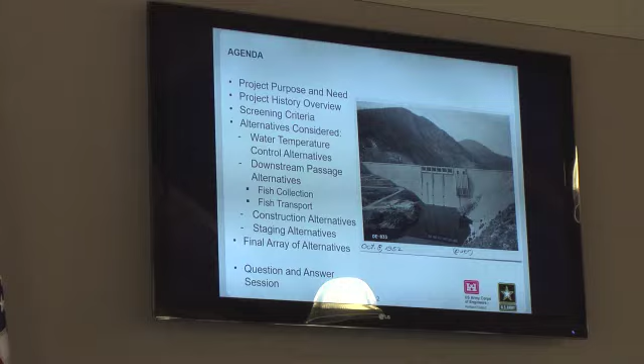Then I'll go through the history. It's a complicated timeline slide, so we'll go through it step by step. It might take a minute. Then I'll talk about the screening criteria, so how we decided which alternatives weren't going to work and which are moving forward. Then I'll talk about each alternative we looked at from the beginning until now, including alternatives for achieving water temperature control, alternatives for downstream passage, which has two components: collecting the fish and then transporting the fish downstream so they can be released. And then we'll talk about the construction alternatives and the staging alternatives.

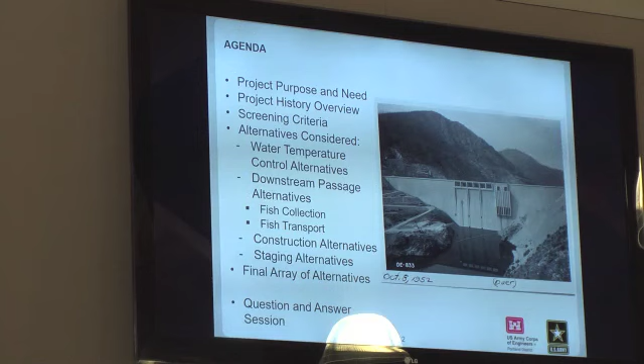And then finally, I'll show you a table of the final array of alternatives that will be analyzed in detail in the environmental impact statement. And then, like Dustin said, we'll go into a Q&A session. We'll do a short open forum, and then we'll ask everyone to go to the back of the room and talk to the experts one-on-one.

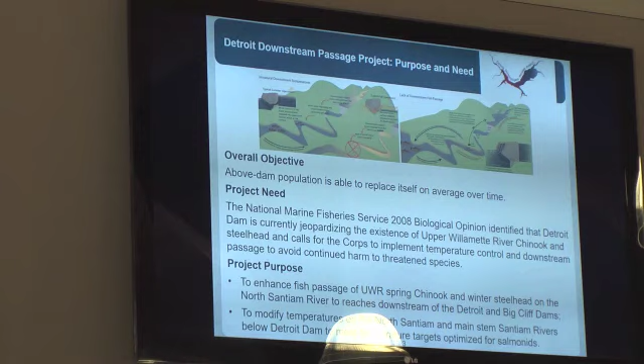All right, so the overall purpose of this project is to achieve above-dam populations of upper Willamette Chinook salmon, which are the listed species, so that their population can replace itself on average over time. That's the overarching goal.

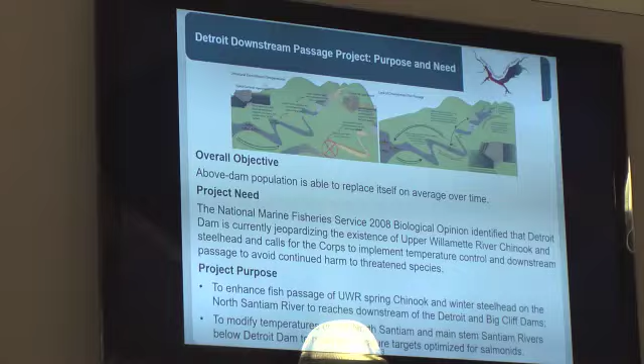The need for the project is that we have a biological opinion from the National Marine Fisheries Service, also known as NMFS. In 2008, they came out with this BiOp, which said the Corps' project, the Willamette project, which includes 13 dams—we have a board in the back that explains where Detroit lands in that 13-dam system—is going to jeopardize these threatened fish. So in order to avoid jeopardizing these fish and potentially causing their extinction, you need to do a few things, and two of them were downstream fish passage at Detroit Dam and temperature control at Detroit Dam.

These are two of many measures required in the BiOp. The Corps is working through a slew of measures across the Willamette Valley to address the jeopardy of this fish species, and this is just one aspect of it. That'll be important later when we talk about the history.

And the purpose of the project, like I said, if we're not meeting the purpose then we have to screen out an alternative, is specifically to enhance fish passage at Detroit Dam for this specific species, and to modify temperatures in the North Santiam below the dam to meet the temperature targets optimized for this specific species.

Okay, so the biological opinion came out in 2008. This is what started us off. As soon as that came out, we went out to the public to try to explain what this meant for the Willamette Valley and each of the basins within the valley. And then we started looking at how we're going to achieve this. This has a couple of layers.

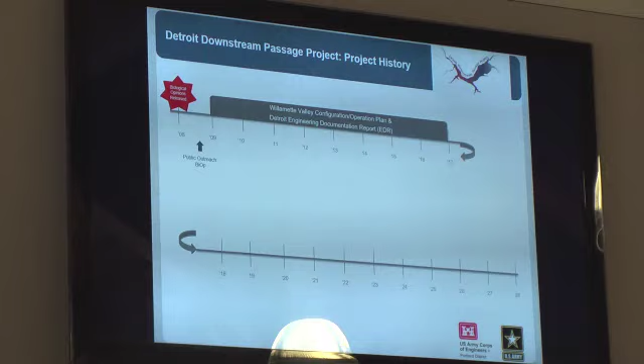The first layer is what's called the Willamette Valley Configurations and Operations Plan, or the Willamette Valley COP. The COP looks at the whole basin and the hundreds of different measures we're supposed to implement—everything from ramping rates at the dam, downstream fish passage at several dams, temperature control at Detroit, some restoration projects. There are many measures we have to deal with.

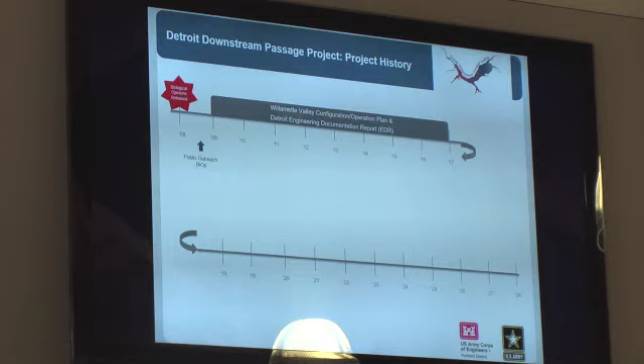So the COP looks at all of those throughout the basin and prioritizes them. In order to prioritize them, they have to look at each one specifically and ask what are the potential alternatives for meeting this measure, how expensive it might be, and how successful it will be compared to other measures, so they can prioritize each one and decide when it needs to happen. In order to do that, they created the Detroit Engineering Documentation Report team that looks specifically at the Detroit projects. That team of experts works on the engineering and environmental issues, then goes back to the COP and reports, and the COP decides how this is prioritized in the grand scheme of things. So it's this back-and-forth iterative process between the larger goal and the very specific goals at each dam.

So in this area, from 2009 until 2017, they started looking at the initial array of alternatives, everything under the sun. This is really a 10,000-foot view of the problem. They're not looking at specific costs at each dam—they're looking at general cost estimates in the millions of dollars, likelihood of success compared to other projects, and the overall risks involved.

In 2010, we went out to the public to try to explain this COP process. And then in 2013, once Detroit's EDR team got a little further along, we went out to the public and said, here are some of the things we've been looking at. It's not all the things, but this is our first cut at the problem.

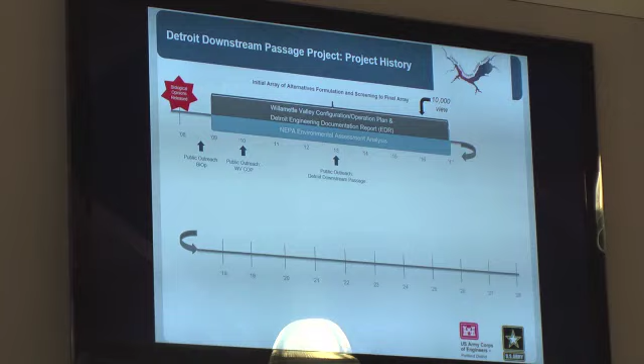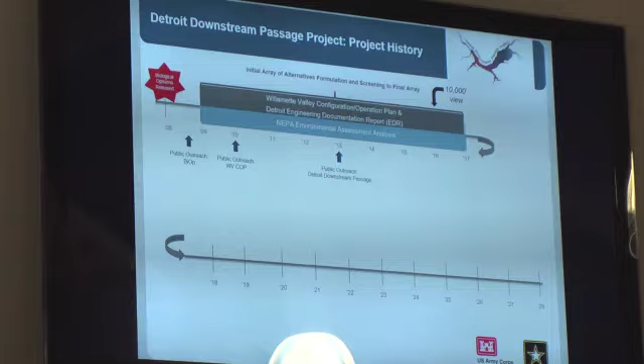And during that whole time, we were doing what's called an environmental assessment under NEPA. There are several layers of NEPA. The first one really is to do an environmental assessment. At the end of that process, you either say there won't be significant impacts from this project and you come out with your action, or you say yes, there will be significant impacts, and we should do an environmental impact statement, which is a much longer and more intense analysis, and it requires more public outreach.

So in 2017, after looking at the initial array of alternatives, we decided that yes, we are going to have significant impacts from this project and we should do an EIS. Instead of coming out with a report saying these are our analysis thus far and we decided to do an EIS, we decided not to waste time on that and just go straight to the EIS.

And that's when we started scoping, which we received many comments from, I'm sure many of you in the room. So public scoping is basically, we come out and we say, here's the project, purpose and need. Here are some of the alternatives we're looking at. What are you most concerned about? And we get your comments. And then every comment that we get, we have to address in the EIS.

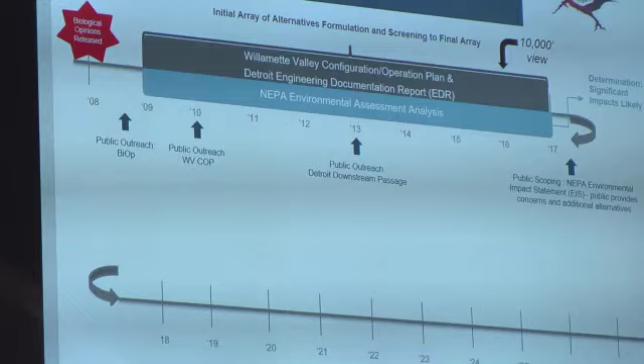So any concerns that we got, if we weren't looking at that topic before, we now have to include it in the EIS. So if you submitted a comment, your comment will be addressed in the draft EIS that you'll see later this year, or later in 2019.

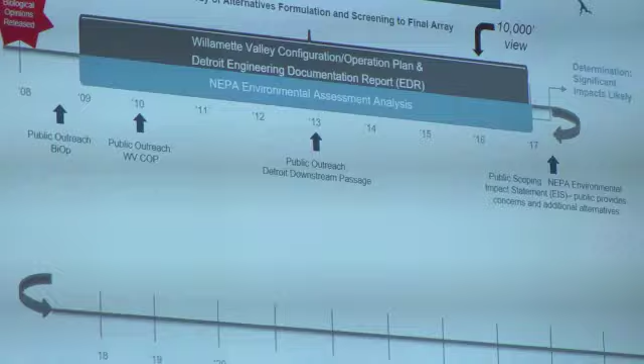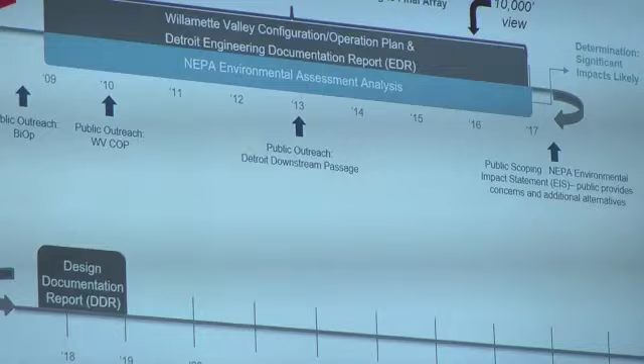All right, the next phase of the project for the design team was we've screened out some of the alternatives because they weren't feasible, they didn't meet our purpose and need, some other screening criteria weren't met, and so we have a much narrower array, we call the final array or focused array, and that's when they start getting to the 1,000-foot view, where we're looking at more detailed costs.

We're actually doing numerical modeling to look at how flows work and whether we're meeting the very strict NMFS biological criteria for the fish. So this is a much more detailed look at the analysis. And we're starting to do more detailed cost estimates.

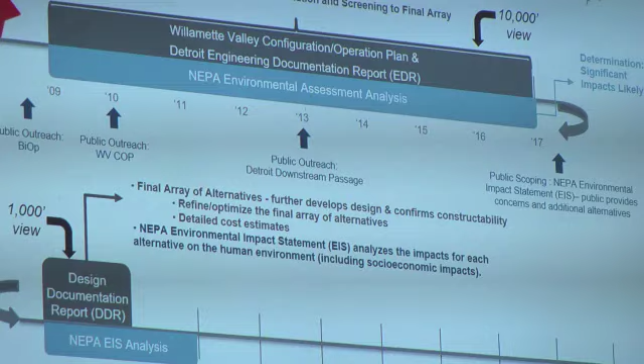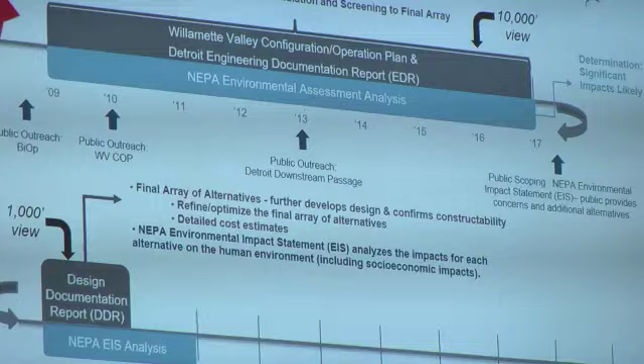In addition, we started the EIS process, which is basically, we did scoping and now we're really looking at what impacts should we include, what are the analyses that we need to do to really look at these impacts and be able to tell the public exactly what we think will happen once we build the project. And also reach out to the public again and say, here are all the alternatives we've looked at.

So this is where we are today, and you'll get to see the alternatives we looked at and why we screened some out. And then later in early 2019, they'll actually be going into plans and specifications.

And this is actually like a really close-up view. Every nut, bolt, and type of concrete is what they're looking at during plans and specs. And the reason it's overlapping with the EIS is that there might be some changes that will have an effect on the environment in that plans and specs process, and we want to be able to capture that in the EIS. So we made sure that overlapped a little bit.

And so once we finish the draft EIS, we will release it for public review and comment, and you'll have another chance to comment. And we will have to address those comments in the final EIS. That is tentatively scheduled for April of 2019.

All right, so once plans and specs are over, we're going to start phase 1 of implementation, which is construction of the actual temperature control piece of the project. We're doing this in phases because we want to incorporate lessons learned from other projects for downstream passage, since it's a really difficult engineering problem, and we're actually doing downstream passage at Cougar Dam, which will be built before Detroit, so we wanted to be able to incorporate some of the lessons learned from Cougar into Detroit.

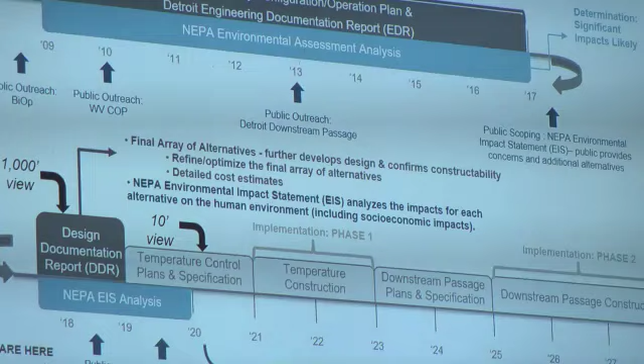And then finally, throughout this implementation phase, we will also be reaching out to the public throughout, so you'll have chances to hear about what we're planning and how it might affect you.

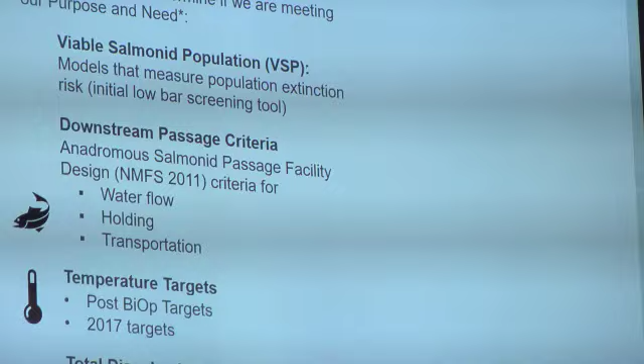All right, so looking at screening criteria, there's biological criteria that we have to meet, and this basically shows us whether or not we're meeting that purpose and need.

The first criteria is called the Viable Salmonid Population, or VSP. This is an actual numerical model, actually three numerical models that work together, and it basically gets at a measure of population extinction risk.

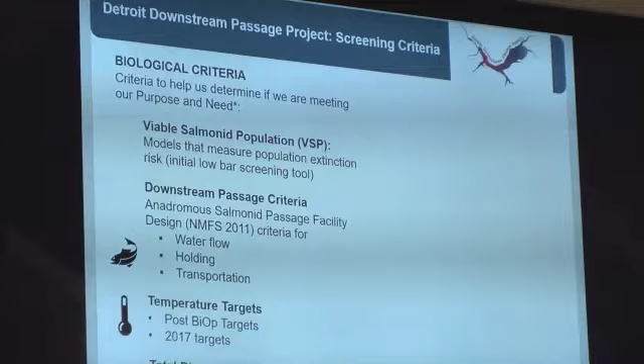We use this early on to set a really low bar and say, are we even going to get close to getting replacement of the dam for the population? If we're not even getting close, then we're not going to look at this alternative anymore, because it's not really worth all the time, energy, and cost to develop something we know just isn't going to work. So it's a very low bar.

Then the other criteria we use, as we get more detailed in our designs, is much more detailed design criteria for water flow, holding, and transporting the fish. There's a manual that NMFS has come out with that's very specific on what we need to meet to say we're successfully doing downstream passage.

And then also the temperature targets, which are based on post-BiOp targets as well as some newer targets that came out in 2017. And finally, there's a water quality criteria for total dissolved gas that we need to make sure we're also meeting.

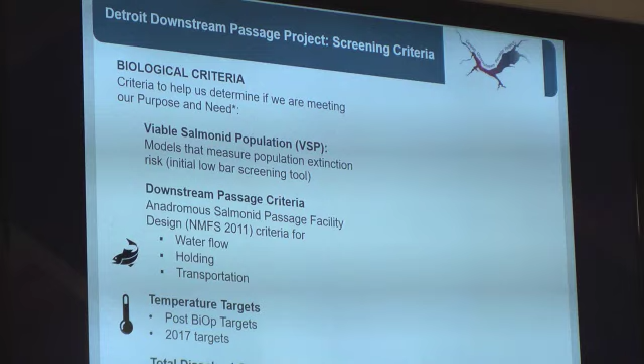And then in addition to meeting our criteria, we also cannot violate any of these constraints. Constraints are basically just restrictions, and they usually have to do with authorized purposes and health and safety.

So the first and potentially most important one is that we have to meet our flood risk management mission at Detroit Dam no matter what, in any phase of the project, because it's the purpose of the dam, and we don't want to put anyone at risk downstream. So if any of the alternatives put a flood risk at all, it was screened out.

The second is that all of our alternatives have to meet dam safety requirements. That's a pretty obvious one for health and safety.

And then finally, over the long term, we can have short-term impacts to these, but over the long term we have to meet our other authorized purposes for the dam, which includes recreation, water supply, and hydropower. So if one of our alternatives means we're not going to be able to produce the power of the dam in the long term, it was screened out.

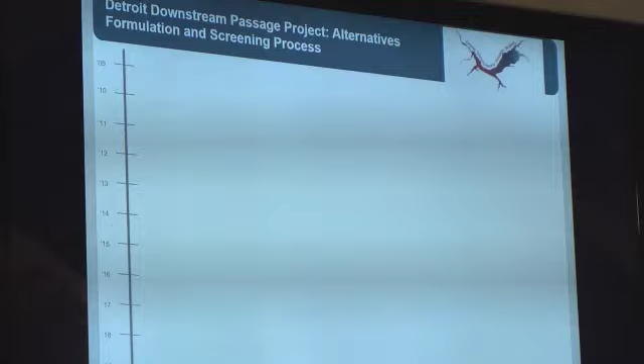All right, so this is going to talk a little bit more about how the COP works with the EDR, and how we got down to the alternatives we have now. First there's the whole Willamette Valley focus, and then there's the Detroit focus.

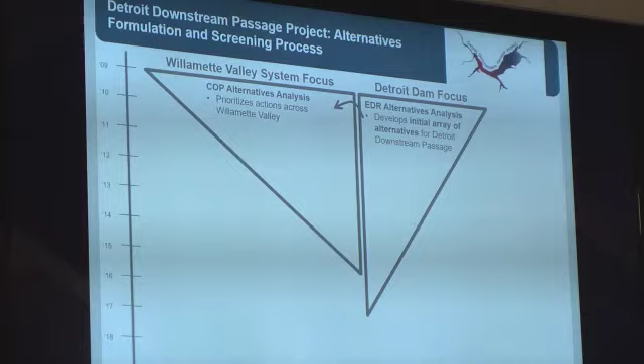And these work together. First there's the COP analysis that looks at and prioritizes all the measures across the Willamette Valley, and that uses information from the Detroit team to help prioritize things, looking at cost, risk, and other factors.

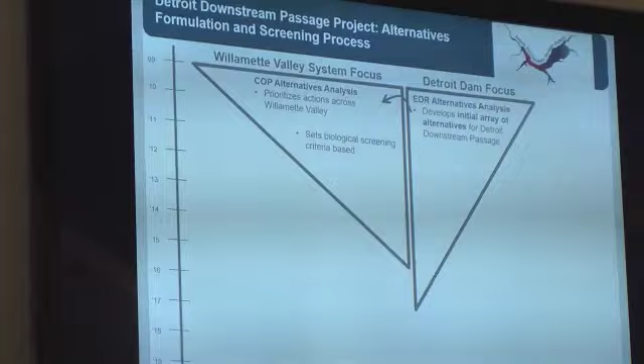They also set that VSP biological criteria, and the EDR team used that criteria to do their first run of screening.

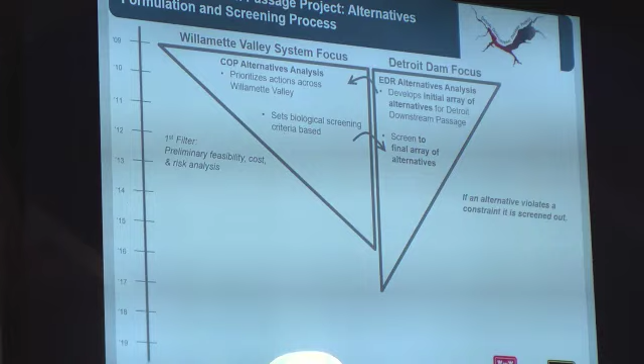The first filter that we really looked at was, is this even feasible technologically, engineering-wise, or in doing a very large, high-level, not very detailed cost analysis, weighing different projects against each other. And then also the risk analysis that looked at whether or not we were going to violate our constraints.

The second level of filtering was that VSP biological criteria that I talked about. And then as we got more detailed in our design, we looked at that fish passage and temperature target criteria.

And then finally, we move into the DDR, the Detroit Design Documentation Report, which is that more refined documentation that continues to use that passage criteria as we get more detailed, but now we're also looking at detailed costs and detailed impacts. So the DDR goes to our EIS team and says, hey, what are the impacts?

Water supply is a really big concern for the public. Should we be looking at that more closely in terms of each alternative in our final array and what those water supply impacts are, and maybe prioritize some alternatives over others? And then we provide that information to the design team, and they re-look at each alternative and refine it.

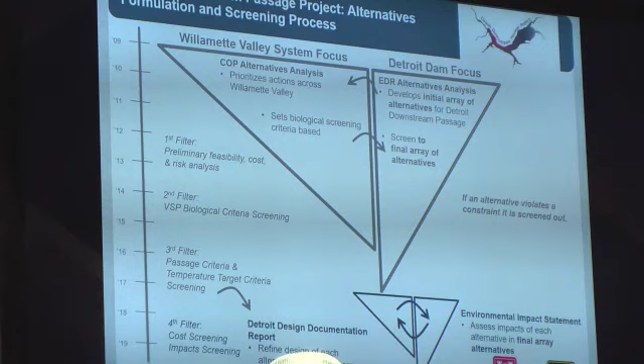So this iterative design process, we're not really making a ton of decisions other than screening out ones that really aren't feasible or not going to meet criteria, until this phase, until we get really detailed. And then eventually we'll get to a selected or preferred alternative, which we have not gotten to yet.

All right, so getting into salmon a little bit. I'm not going to talk about all the design criteria, but at a very high level, we screened a lot of alternatives because of salmon behavior. We've done a lot of research and monitoring to look at where salmon are and how they behave. And one thing that we know for sure from all of our analysis and sampling and monitoring of the fish at Detroit is that salmon are surface oriented.

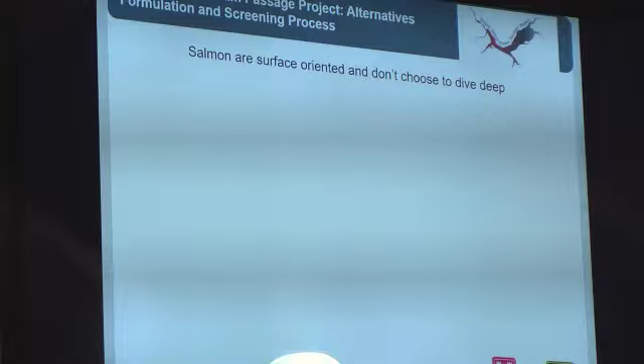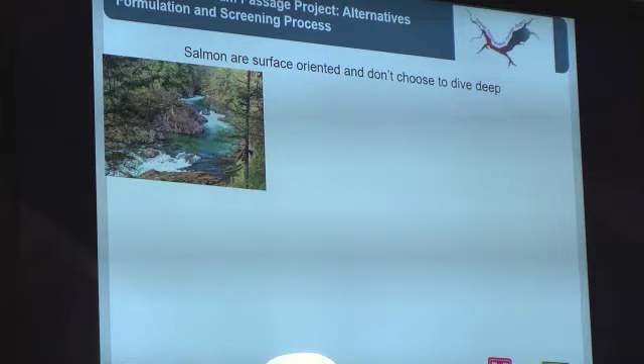They stay at the top of the water and they're looking for flow. They're looking for a waterfall to get down. So they don't like to dive deep. They like to stay at the surface and they're looking for that waterfall. They like that a lot.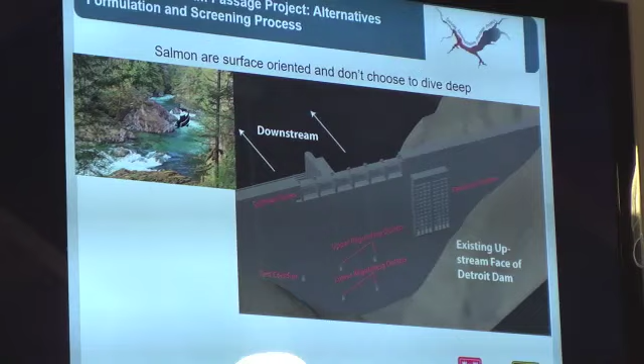This is the dam. We have several ways for fish to get through it right now. We have the spillway at the top, which is only accessible during certain times of year when the reservoir is high enough. Then we have the penstocks, which is how we make hydropower, where the turbines are. And then we have what are called regulating outlets, which help us manage how much water is leaving, especially for flood control.

Those are at the very bottom of the dam, so they're super deep, like hundreds of feet deep. And then we also have a little test conduit that the Navy put in that we don't really use, but some of our alternatives looked at potentially using that.

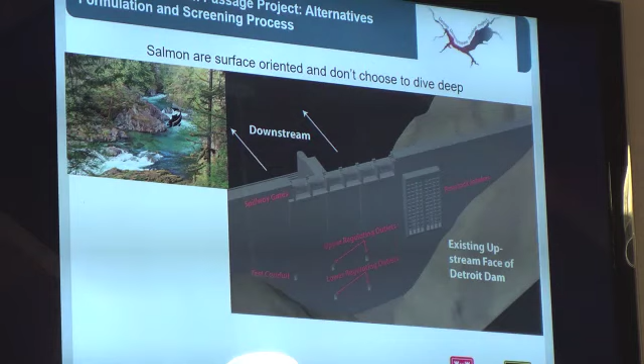What we know for sure is that fish are attracted to that spillway because it looks like a giant waterfall. However, it's also a 400-foot slip and slide that's made out of concrete. So there's a lot of mortality and injury associated with fish going down that. So any alternative that focuses fish on moving through the spillway is likely to be screened out.

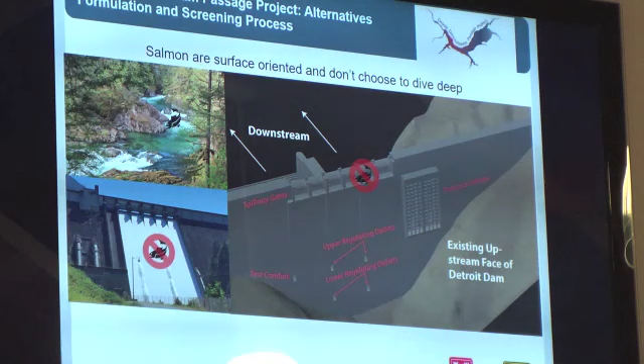Additionally, the penstocks are really dangerous because they're going through turbines. And then, like I said, fish don't like to dive. So anything that focuses fish to go through the ROs is not going to be successful because they don't like to dive that deep.

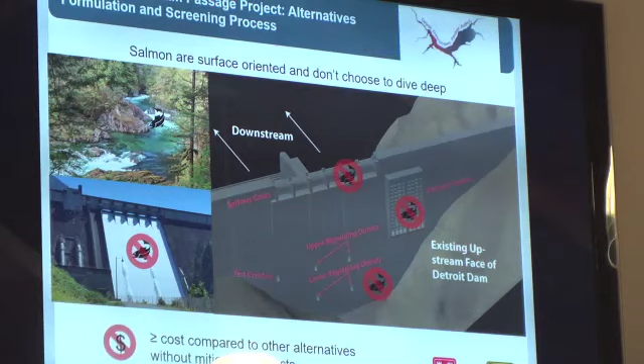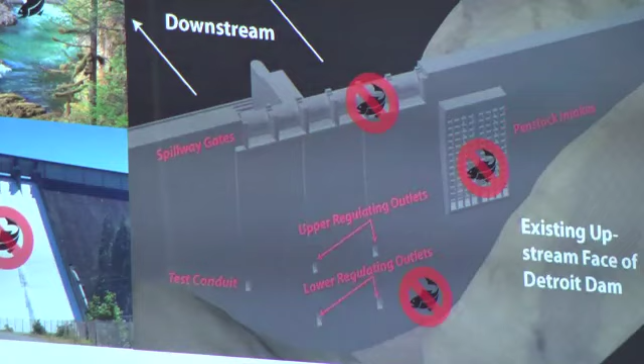And then finally, we looked at cost in the sense of looking at two alternatives together. Does this save us impacts, or does this mitigate impacts? Maybe it's a little more costly, maybe we should go towards that if it reduces impacts. A lot of alternatives we looked at in that lens, we found that they didn't actually decrease impacts and they didn't decrease costs, so there was really no point to moving forward with them, so we screened those out.

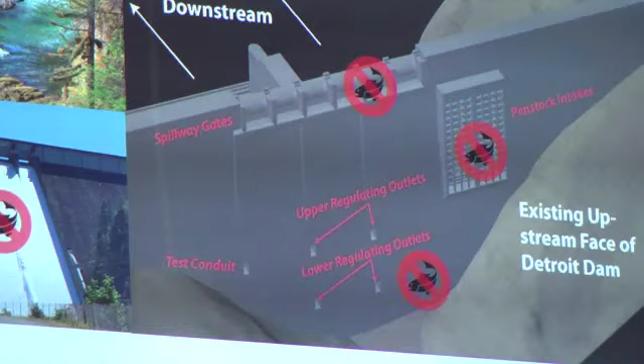So anytime you see that money sign with an X through it, it just means that we compared it to another alternative. It didn't really minimize any impacts, and it either costs more or costs just as much.

All right, so in total, we looked at 21 alternatives for water temperature control, 8 alternatives for fish collection, 3 alternatives for fish transport, 7 alternatives for different ways to construct these projects, and 8 alternatives for where to stage materials and equipment. Of those totals, 4 temperature control, 1 fish collection, 1 transport, 3 construction, and 2 staging areas we got from the public.

So we heard those comments, and then our team took them back and did an analysis on them to see, are these feasible? Is this a really good solution that we haven't thought about? So that's kind of how your comments have been used in our process.

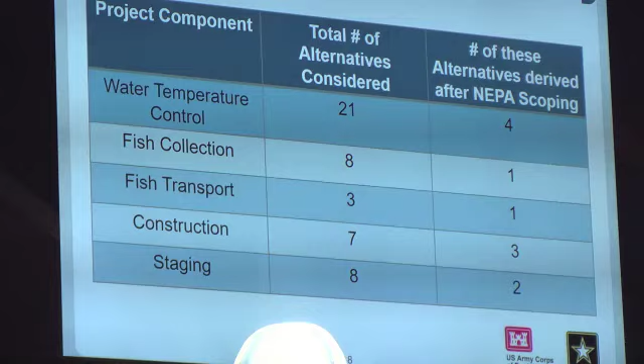All right, now getting to the meat of the presentation. So we're going to talk through temperature control. I'm going to switch back and forth with Jeff. We're going to start with operational. So this is basically, we're not going to build anything. How can we operate the dam better to meet our temperature targets?

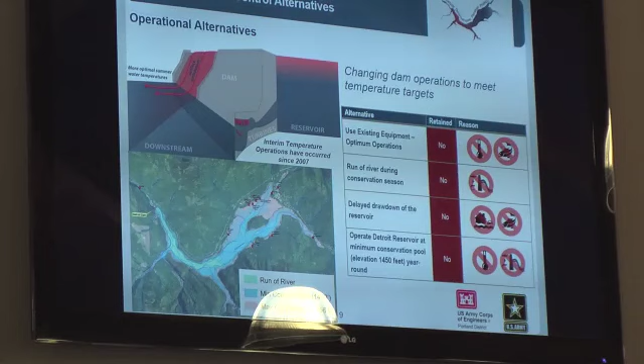The first alternative we looked at was use existing equipment, just optimize how we use the dam. We're actually already doing this. In 2007, we started operating the dam to use the spillway.

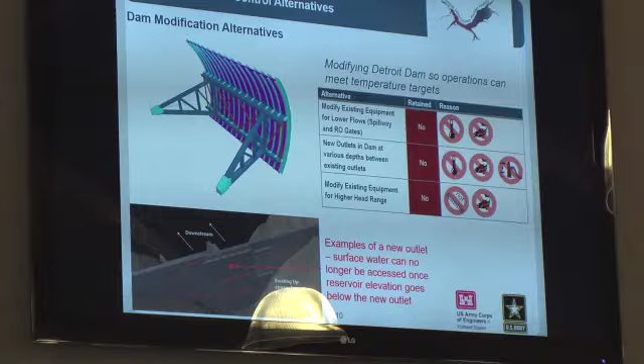So I'm going to talk about some of the other alternatives. Maybe - I think you can hear me fine, but can you hear me fine back there? Yeah. Okay, so some of the alternatives we looked at here are, I'll say, easier alternatives involving modifying the dam.

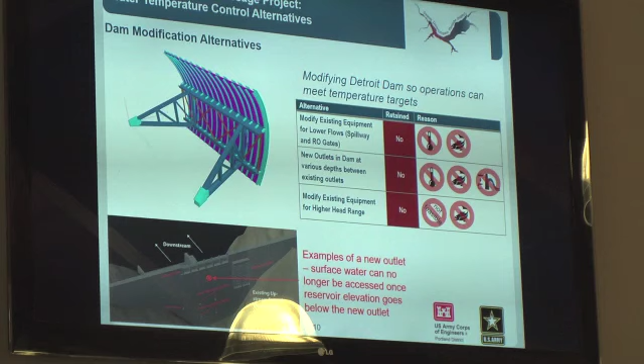The first one is to modify the existing equipment for lower flows. You see that Tainter gate, that's one of the spillway gates, but you have to crack that open with a minimum opening, which dumps a whole lot of water. So the idea here was to put smaller gates within that spillway gate to let less water out. But that was ruled out because, as Kelly already said, fish going down that spillway is not safe, and it only operates for temperature whenever we're above spillway crest, so it's not all the time we'd be able to do that. So that was ruled out.

Then another one we had was new outlets in the dam at various depths between existing outlets. You see on the bottom there, that image - we've got the spillway up high, we've got the regular outlets down low. The idea was to poke some other holes in the dam to get different elevations. We decided that doesn't cut it either, because now you've got just a couple fixed holes, and you have to try to hit the right temperature targets, and that's difficult. Fish would have to dive down to go through whichever one's closest to the top, and it doesn't meet all of our authorized purposes, so that was ruled out.

Then another one was - we have limitations on when we can operate the different regulated outlets because of head restrictions, in other words, how deep the water is and how much force there would be on those. So we looked at whether we could modify those different outlets to allow them to operate over different ranges. That was ruled out as not feasible and again, not safe for fish, because fish would be diving down and going through those different outlets.

Let's see if I can make this work. Down.

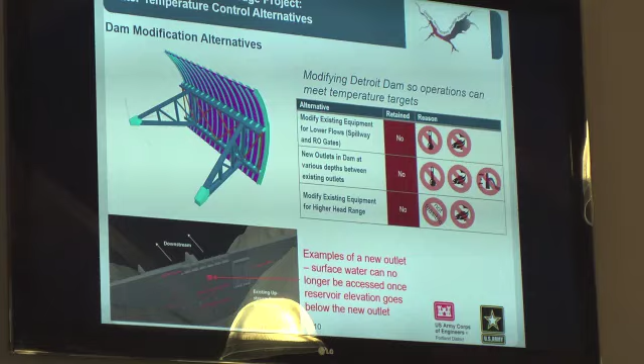I knew it wouldn't work.

Then we had variations of that. We have a sliding outlet, a single sliding outlet, trying to hit the right spot for the temperature. That's very difficult to do, and it's not good for fish—they could be diving down some amount.

And then a floating outlet with sliding outlet—that would have the floating outlet near the top with the sliding outlet very close to that, and you have competing interests. And then we have a short selective withdrawal structure.

The idea there was when you're above spillway crest, you could use the spillway. When you're below spillway crest, you have this tower, let's just say, that's only built to the bottom of the crest of the spillway, so you save some money by not having to build it as tall. But again, the spillway is not a safe route for fish passage, so that was ruled out.

The next alternative, the last one, is a floating surface outlet on a narrow tower. Kelly mentioned the Navy test conduit that was put in when the dam was built—another way to pass some amount of water, like a regulated outlet. So the idea was, what if we built a small tower and let some amount of water go through there to hit our right temperatures and pass fish through that also.

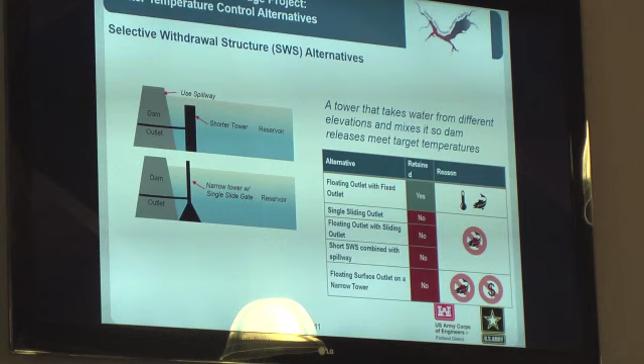So then the next alternatives are what we were calling out-of-the-box type alternatives. The first one is to put pumps and aerators in the near field of the forebay. The idea is the temperatures stay warm at the top and are colder at the bottom, so you pump and agitate that water so it mixes, so you don't have a stratification of warm water and cold water. You get that mix of temperature, which is what we're trying to shoot for in effect downstream.

But that would take a whole lot of energy trying to run pumps that are turning that reservoir over, because there's a mountain of water up there coming down that's just going to replace the water we just stirred around. So that was determined not feasible.

Next up is a heating and cooling system for the water—pick the water out from wherever we're currently picking it out, but put a heating and cooling system on that. Again, that's a ton of energy. We'd be sending power up to Detroit to do that, versus Detroit generating power that gets sent out on the grid. So that got ruled out as not feasible.

Pump water over the dam—again, that sounds doable, but until you look at the details... and we're not talking about a small amount of water, we're talking about the whole entire North Santiam flow, which could be 5,000 cubic feet per second, a ton of water we'd have to pump up over. And we're trying to hit a variable pool that hits the top of the reservoir pool elevation, which means you'd have to have a structure similar to what we're talking about in order to hit that top surface all the time. So that's very complicated and not doable.

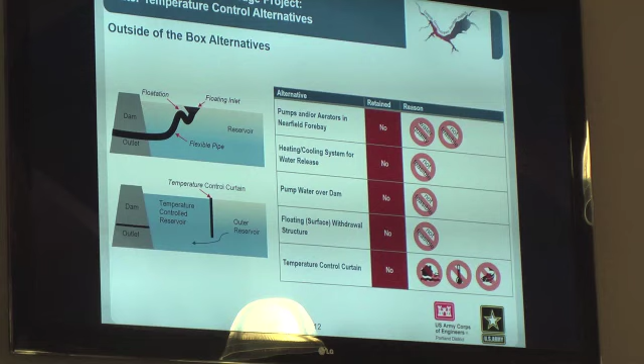Another set of things we looked at: during our public scoping meetings, we heard comments about bringing in outside experts who build things in deep water and that kind of thing. So we've done that now.

The very first idea they came up with was, what if you build a sloped SWS? Out along the highway where the dam starts, where you can park and walk across onto the dam, there's a canyon wall made of rock. Their idea was, instead of building a vertical tower, build it leaning back on that rock face. It sounds really cool because, in effect, you've got one wall of the structure built from the rock face. The idea at one point was you could build that wall as you went down, and as you worked at the bottom and filled back up, you could build the other three walls.

You could have your fish collector hanging on that, going up and down in the water. But as we looked at this, instead of a vertical system where debris comes in and sinks down, you'd have an angled structure where debris would come in and lay on it. So we ruled that out, as it's not an operationally sustainable system, and we moved away from that.

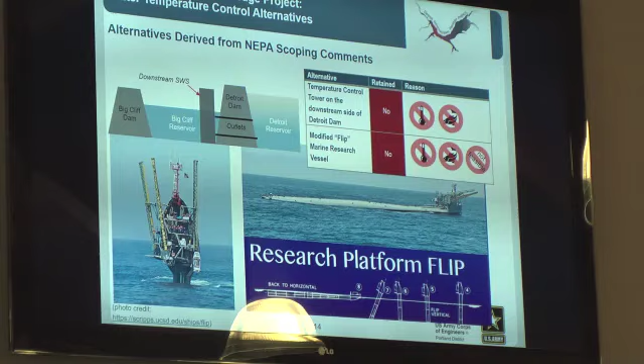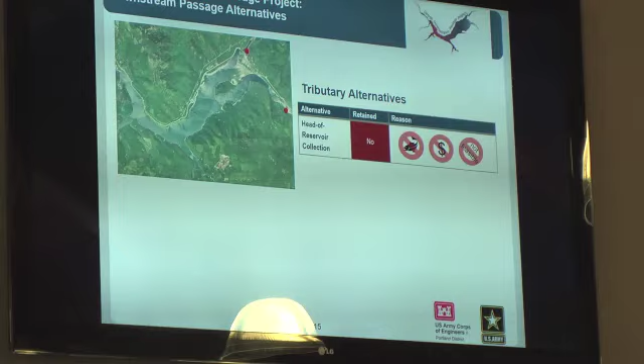Now I'm going to switch into downstream passage. What we're looking at here initially were tributary alternatives, where you collect the juvenile fish in the tributaries, not at the dam, not in the reservoir, keeping them out of the reservoir. So we looked at that. They're called head-of-reservoir collection.

But if you did that, you see two red dots there. In order to be successful, you have to have one of those at every tributary you want to put the adult fish in. They can go upstream at that point and spawn, and then you have juveniles coming down. Well, in order for a collector to work like that, you'd have to build a little miniature dam to make some impoundments so the fish don't just swim right out to the reservoir. And it only works for whichever tributaries you pick, instead of letting the adult fish swim up whichever tributary they choose. So that was ruled out for fish, and every time you build one, it's not just one, you're building multiples. So, dollars, and we determined that's really not very feasible to move forward and build additional dams.

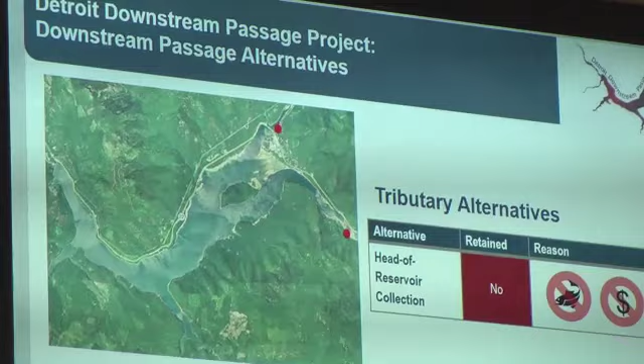And then we had some operational alternatives: an annual deep reservoir drawdown. In other words, draw the reservoir down and flush the fish out. We decided that doesn't meet all of our missions, all of our authorized purposes—for instance, water supply, recreation—because if you're constantly flushing the water out, draining the reservoir down. And it doesn't guarantee that the fish will go out at the right time. They might be wanting to go, and they'll dive down and go out and die in the process of going downstream. So that was ruled out.

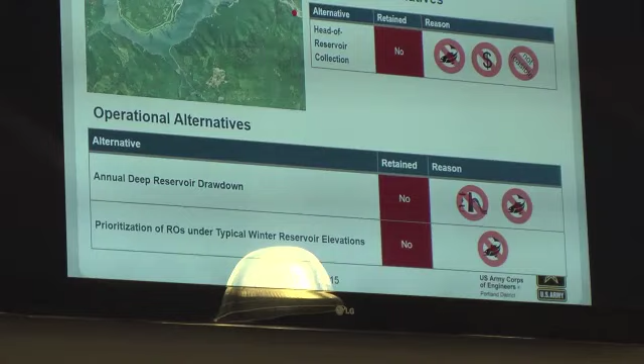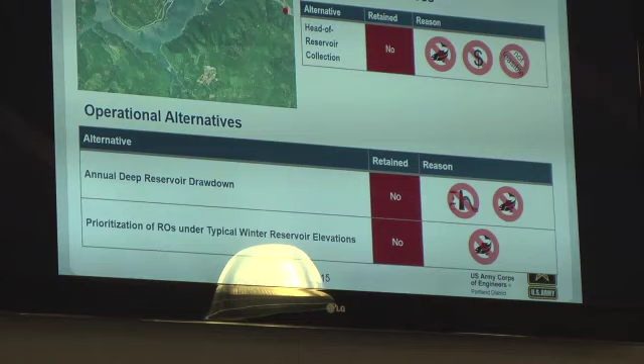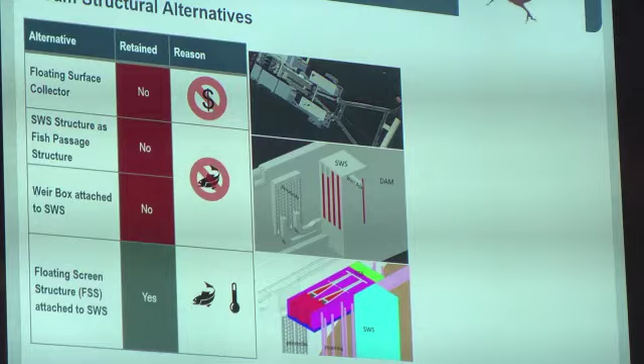Then the next up are structural alternatives for fish passage that are at the dam. The first one there is the floating surface collector, that's that top image. They're basically a big V-screen, and you're running a bunch of pumps to draw water in, and then you dump that water back out in the forebay on the backside of the thing. We ruled that out because that has a big long-term operations and maintenance tail—you got to pay for the power to run those pumps, you got to maintain those pumps—and we have something in our favor, and that's a lot of gravity water flowing down through our system.

So then the next one is utilizing the temperature—the SWS, the selective withdrawal structure—as a fish passage structure. We ruled that out because, again, the fish go into it since it's a surface flow, so they might go in, but then they'd have to dive down to the bottom and go out through the penstock or the regular outlet, so it still doesn't serve any real purpose.

So then we looked at what if we have a weir box attached to the selective withdrawal structure. That's the tiny little box you see sticking out on that big tower. The idea is the fish would swim into the selective withdrawal structure, they would get trapped in that wet well, and they couldn't swim back out. Now we've got them in what I always refer to as a small bathtub instead of the whole entire reservoir. So they would find that spot, but then we would have a small amount of flow out into this weir box and catch the fish there, because they would want to go there instead of dive down.

All sounds really good on paper, but when we did more engineering and hydraulic calculations, the water goes in, and there's so much water feeding the two turbines that it dives down, and the fish would never be able to find that weir box because it has too low a flow through it. So we ruled that out, which leaves us with the one that says yes: a floating screen structure attached to the SWS, or the temperature tower.

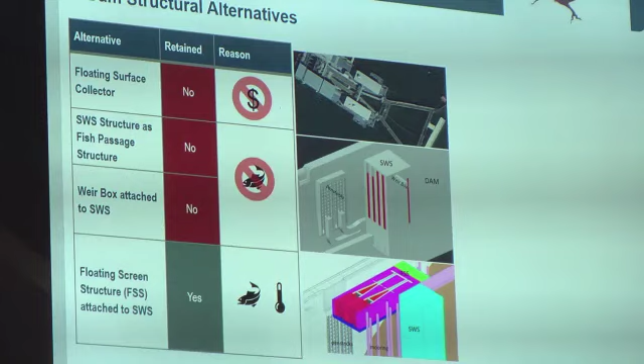One alternative we got for downstream passage from the NEPA scoping process was to use a floating net capture device that attracts fish by pumping water out of the reservoir through a large hose or pipe through the dam spillway. Whenever the words net and capture are in the same sentence, the fish managers and biologists don't like it, because we're trying to let these fish volitionally go downstream, not hook them up in a net. It's probably not safe for the fish, so we ruled that out as it doesn't meet NMFS criteria, and we're not moving forward with that.

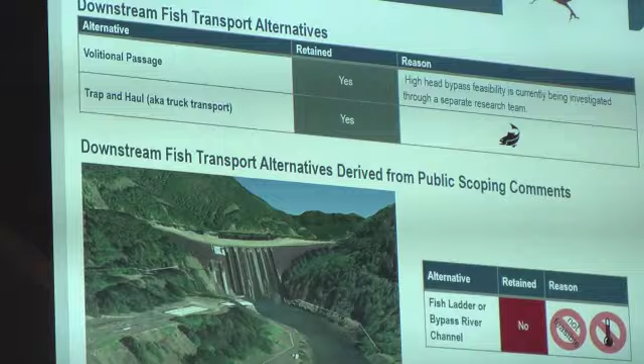We also are looking at, as Kelly said, downstream transportation alternatives. The first one is volitional passage—that's probably the Cadillac of everything. You let the fish come in, just like Kelly showed earlier, where you have a natural river like you see out here, and fish just naturally migrate downstream. So what that would be is you capture the fish in the fish collector through that V-screen.

Back at that green box I showed a second ago, you have a pipe that connects up, and at Detroit we have that test conduit. So you'd have a pipe that somehow goes from the back of that fish collector down through that hole. Now there are a ton of challenges, because you've got this reservoir changing 120 feet, and this pipe has to go through a fixed point. We haven't figured that all out, but we're working it, and that's another team I've got on that.

Then the other one is what most other facilities like this have done, and that's trap and haul, where you capture the fish in that green box at the back of the collector, and then there are pods or hoppers that have the juvenile fish in them with water. You pick those up, put them on a truck, drive them downstream somewhere, and let them go loose, and they go out to the ocean.

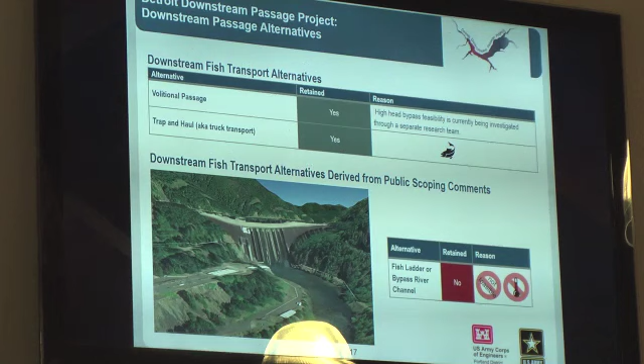One alternative that came out of the public scoping was some kind of fish ladder or bypass channel. Detroit Dam is 450 feet tall with a varying reservoir elevation of 120 feet. We'd already looked at that and dismissed it way early on, but we looked again, and it's just not feasible. It's not like the Columbia dams where we have fish ladders and the pool only changes 5 feet—here we're talking 120 feet. So it's not feasible to move forward.

Now I'm going to turn it back over to Kelly.

So after looking at all those alternatives, we came up with the one that really is the only feasible option and meets our purpose and need and all the screening criteria so far: a selective withdrawal structure with a floating screen structure, and potentially trap and haul or volitional passage. So how do we construct that? These are the alternatives you saw at scoping probably. The first alternative, the favorite of the construction engineers, is to do a deep drawdown and build in the dry, because it's easy to build a tower or any large structure when you're not under hundreds of feet of water.

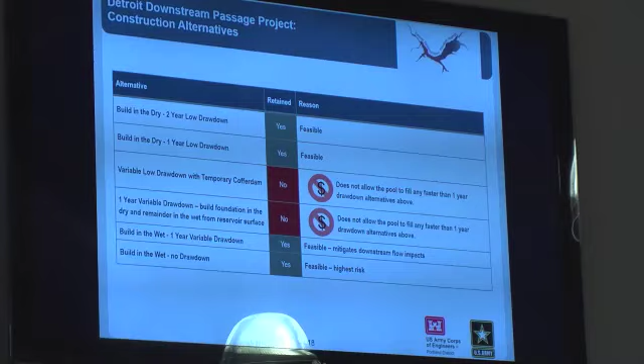Do that for 2 years. The next alternative was to do a deep drawdown for a single year: build as much as you can in the dry, do all the blasting and the foundation, which is some of the hardest work, build as much as you can, and then build the rest in the wet.

Both of those are feasible, so they're going to be in the EIS as potential alternatives, and we're going to look at all the impacts associated with that. We understand those are very concerning for everyone because they have major impacts on recreation, on water supply, on environmental flows for fish downstream, and on water quality.

Then we also looked at what we called a variable low drawdown with a cofferdam. Basically you would draw it down, build a temporary dam around your construction area, and then let the lake fill up, and you'd have a dry area behind that. Unfortunately, that's not feasible and it's incredibly costly, because you're basically building a 100-foot temporary dam within a dam. So we screened that out pretty early on.

The next one we looked at after scoping—actually this was shown at scoping as still feasible—was doing what we called a 1-year variable drawdown, where we would draw down, build a foundation, and then raise the elevation of the water to wherever we finished and continue building in the wet as we move up. So it would all be during construction, but we would move the lake around to meet us. We screened that out because it doesn't really do anything additionally for us; it helps a little because we're building in the dry, but it still has the same effects as the 1-year drawdown building in the dry. So it didn't pan out as a feasible option worth looking at further, so we screened that out.

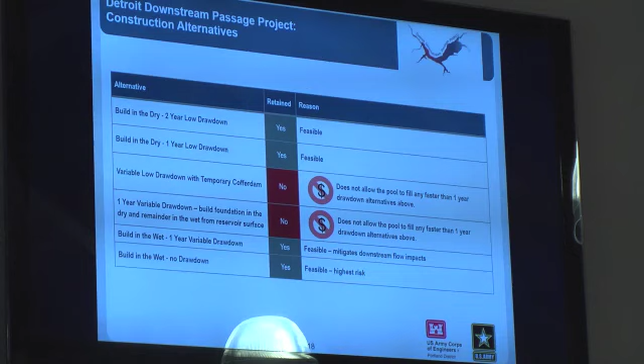Some construction alternatives we got from scoping: one really interesting one was what we're calling dams within a dam. In order to meet the concern for water supply, could we build a bunch of temporary dams to hold back water, but still have a dry area to build down near the dam?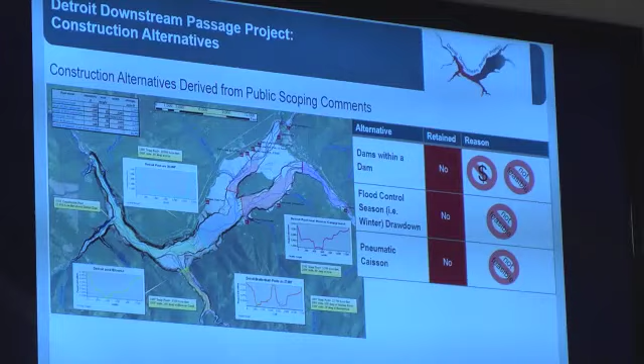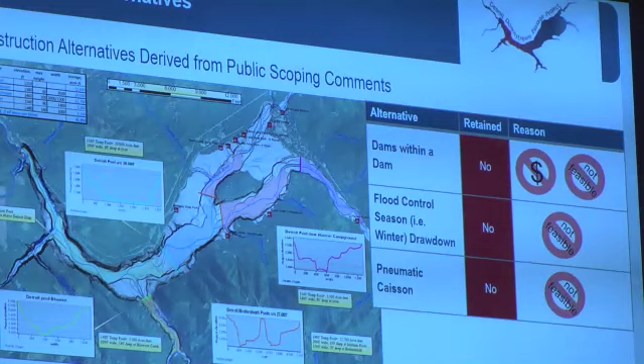So we looked at that, and a temporary dam is typically a blow-up dam. They're max about 20 feet tall, maybe 100 feet long. When we did our analysis, in order to hold back enough water to meet water supply demands throughout the summer, we would need to build about 5 of those temporary dams. They would all need to be about 100 feet tall because that canyon is super, super steep. So in order to get any useful amount of water behind them, they'd have to be very tall, and also thousands of feet long. So basically we were building 5 very large dams, and we'd spend a whole season or 2 or 3 just building temporary dams. So it doesn't solve any of our problems. Good idea, didn't pan out.

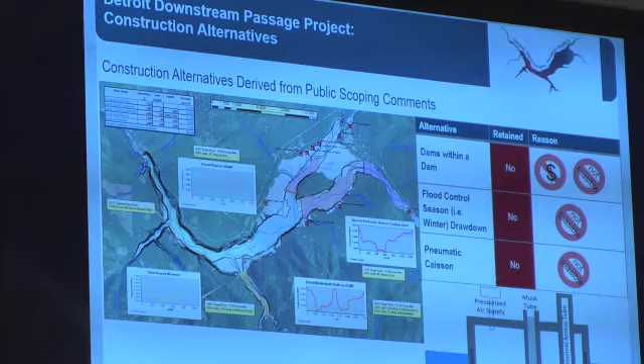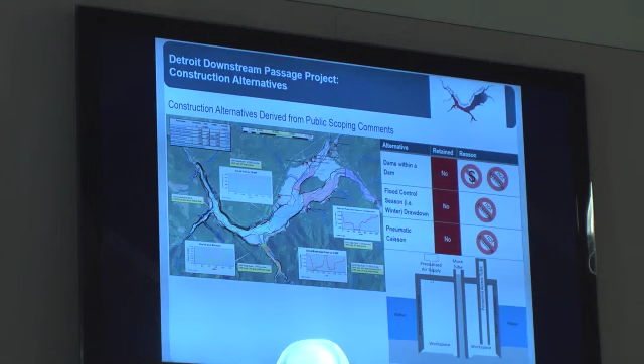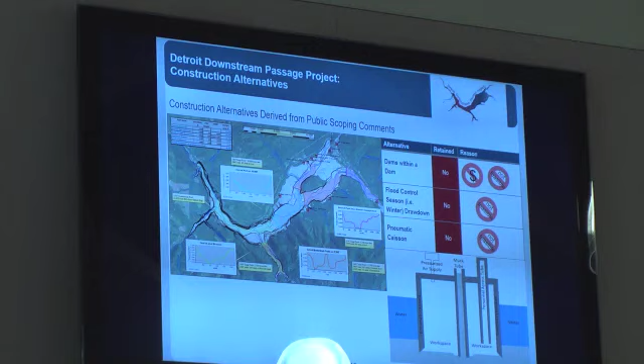Oh, I missed the middle one. One thing we got over and over actually was, why don't you just build this in the winter when you're not going to be impacting anyone?

Because the reservoir is already drawn down a lot in the winter, we did a lot of hydraulic modeling to determine if that was feasible. Maybe it would take us 10 years rather than 5, or 20 years, but at least we wouldn't be impacting folks. So we looked at that closely, and based on the entire record of hydrology, this dam fills up very quickly with each storm event. It can go up 80 feet in a day or a couple days throughout the winter.

When we looked at it, we'd have maybe 34 days in the dry during the winter, throughout that 3-month period we do winter reservoir operations. Those aren't consecutive, so we'd have days here and there to actually work, and it takes days or weeks to move equipment in and out. We basically found it just wasn't feasible. We would never get any work done. So that was screened out. Good idea, but unfortunately it didn't work.

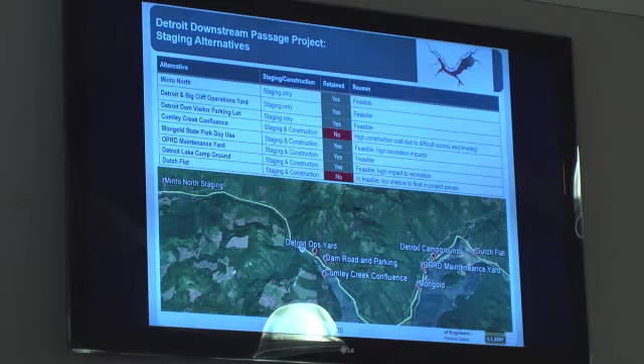All right, staging. Staging is basically where you put your equipment and your materials. We have to look at the impact of that, because often we're taking up space that would otherwise be used, or there's big equipment moving in and out. We might have to cut down some trees, so this is also an important part of construction.

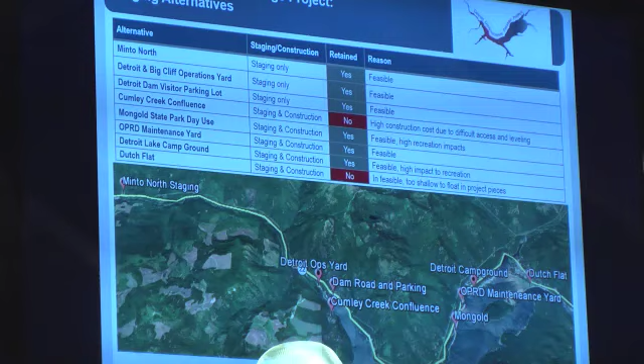We looked at several areas for staging equipment, and also areas for staging pieces of the project that can then be floated into place. For the temperature control tower, you can build pieces of it, float them into place, and put them together like Legos. For the floating screen structure, you basically build the whole thing at a staging location and then float it into place, because it's essentially a large barge.

Of all the staging options moving forward, they're all located downstream of the dam or right at the dam, and they're all areas that we own. They're pretty much out of the way, except for that parking lot right at the dam, but there's going to be a big construction project there anyway, so that's going to be impacted no matter what.

Of the staging and construction areas, we looked at Cumley Creek, just to the south of the dam, upstream. It's a little tributary in a really steep canyon, so it would require a lot of leveling. The cost of creating access roads, leveling that area, and keeping it dry just didn't seem feasible, so we screened that out.

The next one was Mongold State Park, which you saw in scoping. This seemed like a great place—it's flat, has a giant parking lot, really easy and safe access. But what we heard over and over is that it's one of our most visited sites. If you're going to impact that for 10 years, with both the temperature control tower and the floating screen structure, that will affect the community tremendously for a long time. So we heard that loud and clear, and at the time we had no other ideal flat places that we could float things into from.

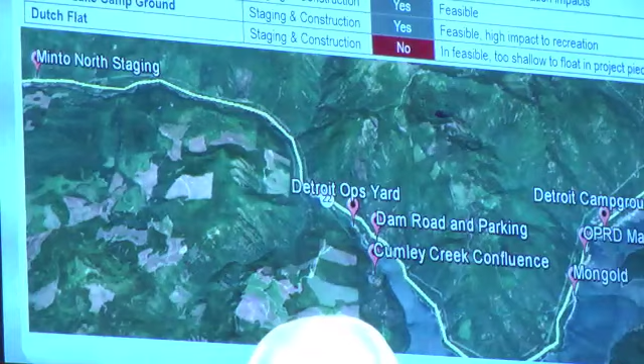We have the Oregon Parks and Recreation Department maintenance yard, which is right upstream of Mongold. It's not accessible by the public, so we wouldn't have safety concerns there. It's got a pretty easy exit off the highway, so that would be safe, and we could share the area with the maintenance yard folks. It's actually a flatter surface than Mongold, so it would be easier to construct there. We were really excited to find that place.

And then right upstream of that is the Detroit campground. It's also flatter, and it has okay access.

We would have to deconstruct half of the campground, which is about 50 years old, so it's an important place, just in terms of being a place that's been in the community for a long time. And it's a really nice campground. We'd also have issues with public safety because there would be folks using the area right next to big construction. So we are looking at that. It's feasible, but it's less attractive than the maintenance yard.

And then finally, we also looked at Dutch Flat upstream, but it's too shallow up there to be able to float things into place. So we screened that out as not feasible.

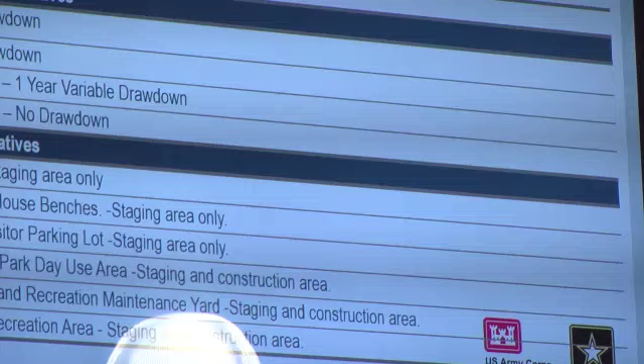All right, so here we are at the end finally. Thank you all for sitting through that very detailed presentation. So of course, under NEPA, we always have to look at the no action. That means if we did nothing, what would be the impact of the project? It is also a way of comparing the impacts of the project to existing conditions. So we are still looking at no action.

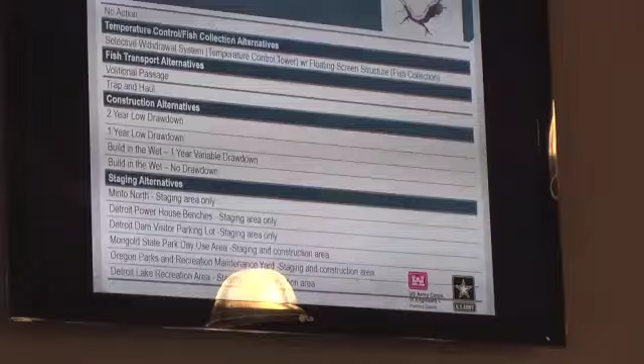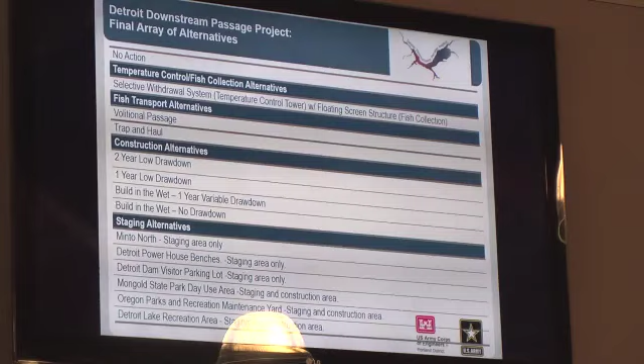And then for temperature control fish collection, there really is only the one feasible option at Detroit, which is the selective withdrawal structure paired with a floating screen structure. And then for fish transport, we're still looking at volitional passage as well as trap and haul. Volitional passage has its own team working on whether or not it's feasible. And then for construction, we have the 2-year drawdown, 1-year drawdown, the variable build in the wet that helps us meet flow needs downstream but reduces some of our risk, and then the build in the wet normal operations.

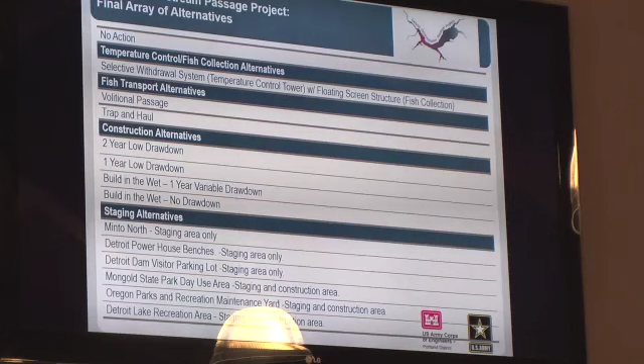So a lot of folks tell me the construction engineers are going to win, we're going to pick the easiest, most cost-effective for the Corps, and that's really not the case. For example, we added a whole new alternative based on concerns, so we're taking it very seriously and looking at these very clearly. The impacts will be fully looked at for each of these alternatives. The costs will be looked at. This isn't just a cost decision, it's an impacts and cost prioritization decision.

And then finally, our staging areas. So that's the array of alternatives you will see in the draft EIS that comes out in April, May, hopefully.